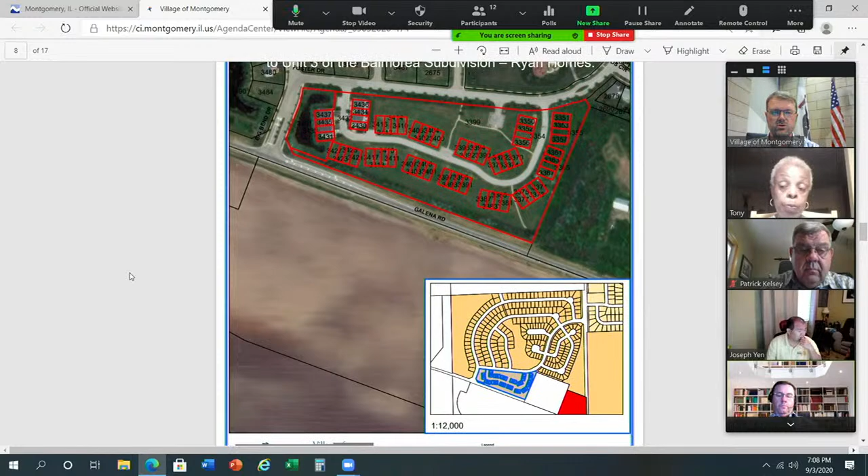Great, thanks Jared, appreciate it. Good evening everybody, thanks for having me tonight. Everybody hear me okay? Yes.

Yes, good. So I think since I've been in front of this group and the village board probably a little less than 2 years ago, we're happy to report that we've had great success in the Montgomery community on the single family side. We've sold 95 houses since the beginning of January of 2019. So really filling that community out well, I think to the pleasure of the neighborhood, and certainly we're happy with the performance there as well.

We are the contract purchaser for the homes. When we originally contracted to purchase the community and used an investor developer as part of that transaction, we did a bit of a delay on the townhome acquisition, really to try to continue to give time for the town market to heal, and such, to make it palatable to continue to move forward on the townhomes.

So I want to take a minute. I do want to let you know that we did have the opportunity to meet with the residents. I met with them personally earlier this week. I had mailed them a copy of the elevations, what we intended to do, the renderings. Met with, I believe, representatives from all the households out there, except for one, which I believe is being rented. And just as a courtesy to let them know what we're doing, we had a good meeting.

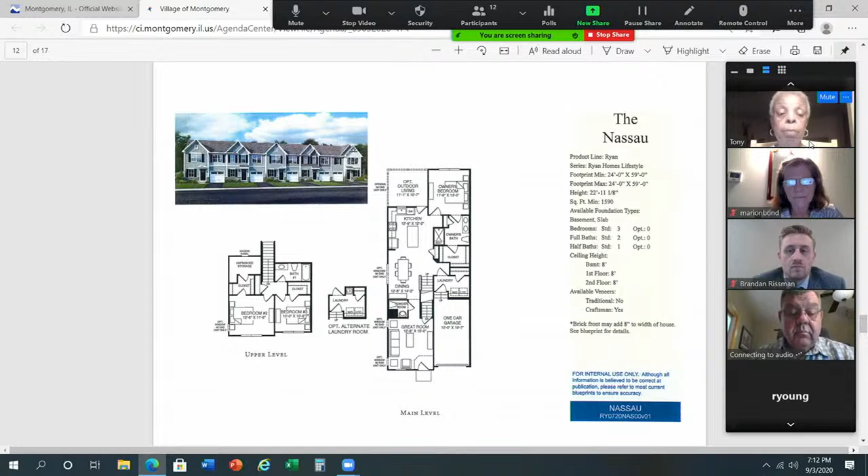As you may know, we are also involved in a community called Grand Reserve, which is a nearby community just within a few miles of this location - actually in Yorkville, but very close as the crow flies to this location - where we have, since being in there a similar period of time, sold 90 ranch homes, all ranch homes. It's an all-maintenance community that we provide, the lawn care and such for, an age-targeted community.

As those prices have continued to escalate over time, we've continued to see some demand for an empty nester product, but a desire to continue to be affordable. Our average price point in that community is roughly $260,000, and there's been a desire to continue to try to get in there and be affordable. We've noticed in the last 12 months, really, an increase in the number of requests for slab units because they were priced a little more affordably, and for that demographic that may not need as much space as what's provided in the 2-story. So given the demand that we've seen there and the desire to continue to provide an affordable product, we believe that this is an attractive option for the nearby area to continue to attract an empty nester.

And with that, of course, can come a desire to not have a 2-car garage or to have it be as necessary, because we do see some one-person families in that particular instance, or less cars. So certainly the demographic is a component of the desire here and why we've chosen a master-down product. And the second is some level of affordability. I mean, we see these priced in the low 200s. We have 2 sets of products within Balmorea right now, 2 different product series - one product series averaging about 250 and the other averaging just slightly over 300. So as a townhome product, this fits in nicely to get it separation from the existing 2-story product that's there.

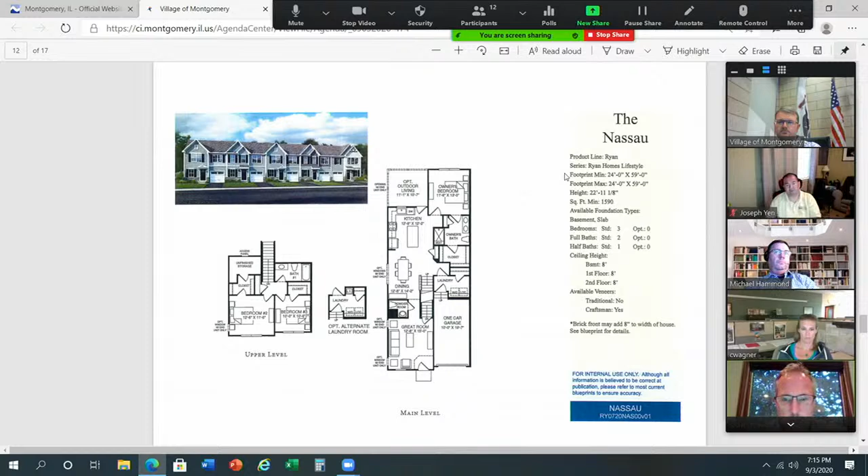I've shown really two options in terms of driveways. I showed a second option based on a conversation with staff that there could be some concern on parking. We are certainly not married to having a dual drive in front of each unit, but as you can see in this current rendering with the floor plan, it shows a single drive. Jared, if you'd scroll to the other picture, it would show it with a second drive. Initially we were not proposing that second drive, but if there was a concern around parking, we wanted to show that could be a potential option to address some of the parking concerns.

We see an opportunity and a need to continue to build out the community. Yes, the units are a little more narrow, but we are fitting within the existing platted building footprint. There's no increase in density. We have an engineer doing an analysis now; there may be some minor relocation of existing services needed given water services and such are in, but we're fitting it within the current window. If anything, the space between buildings becomes a little more pronounced and open because the units are more narrow than what was originally platted from the original developer. We'd appreciate your consideration, and at this point I'll stop and answer any questions you might have.

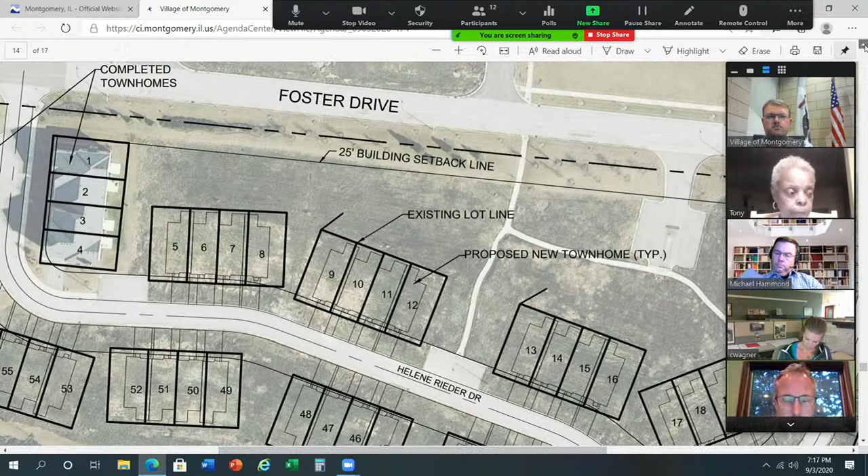It is a 20 -- I believe it'll say on here, I don't want to quote something that's not accurate -- you go up into the upper right-hand corner. 24 by 59 feet is the width and depth of that particular unit. So is that for each? Yes, for each unit, that's correct.

Okay, all right. So the plat for these units is a little bit different than a standard single-family home. A lot of them are platted around the actual physical structure with a lot more shared open space rather than each individual lot having its own private open space.

I hear the comment about seniors and downsizing. Some of the material that I read, however, is that townhomes tend to -- at least in the August 2019 research that I did -- tend to be more toward first-time home buyers, unless it was a designated senior project, for seniors only or in that direction.

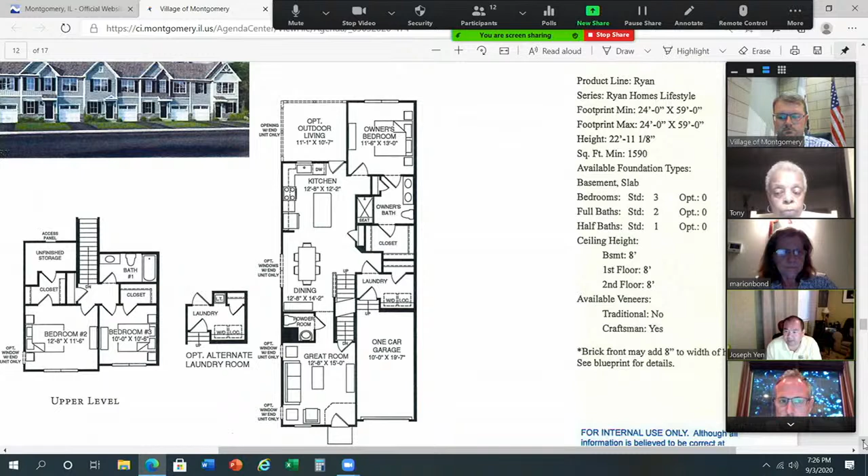I had a quick question. On your diagram for the expanded driveway, was it proposed to be concrete, or will it be the blacktop asphalt like the previous picture of the driveway? The driveways are meant to be asphalt, which is consistent with what's in the community. The picture is showing concrete, whereas the previous picture showed asphalt - I put that to be illustrative of what can be done in terms of a second parking area.

And if you had a second parking area between unit 56 and 57, you show a little overlap on the driveways in that one diagram on page 14. So 56 will be on the left there. Is that just not to scale, or is that something you have to solve for as well if you want it that way? So 56 and 57, you have overlap.

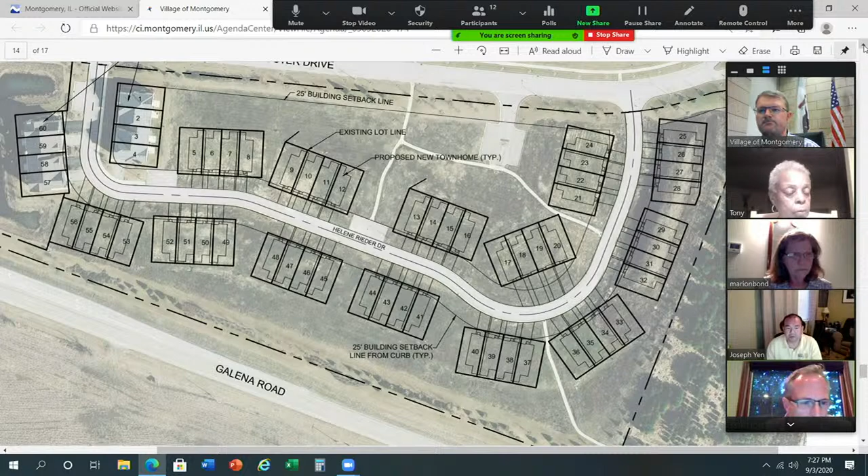So clearly we have plenty of room in the building itself - the black outlines are the original size for what was originally platted and approved and could be built out there. So ours would actually be a lot closer. If indeed there is a conflict there, we could easily have plenty of room within the building envelope to slide that building further towards units 52 and 51 to avoid any conflict. Thank you.

Okay, are there any more questions or comments from commissioners? Since this is not a public hearing, there's no findings of fact or anything of that nature.

The only thing I'd like to add, my preference would still be to see 2-car garages. I don't care for adding asphalt as a parking area in the front yard of a townhome. That's just my thoughts on this. Thank you.

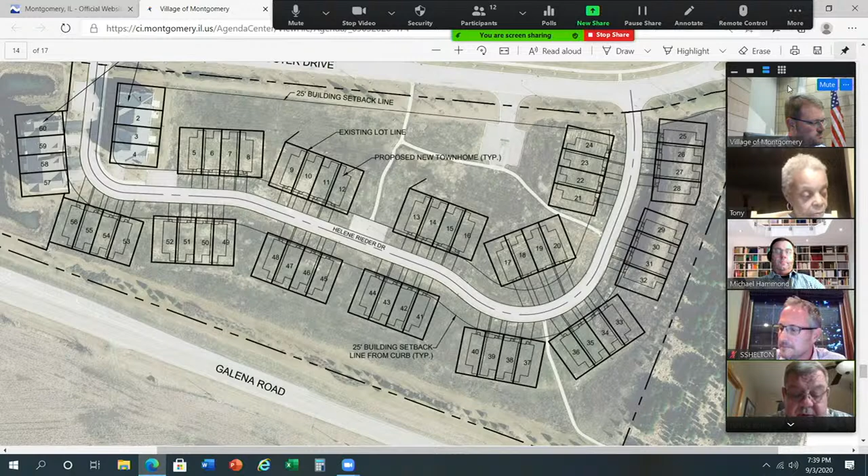I'll make the motion, Mike. I move the approval of PC 2020-007, preliminary plan review for an amendment to the annexation agreement of Unit 3 of the Balmorea subdivision. Thank you. Got a motion, looking for a second.

I'll second. Thank you, Mildred. Chris, can you call the roll please? Patrick Kelsey, yes. Mike Hammond, yes. Mildred McNeil James, yes. Joe Yan, yes. Marion Bond, yes. Tom Yukaitis, yes. Okay, and this item will go in front of the village board meeting on Monday, September 14th. Okey doke, that is correct.

Next item on the agenda, community development update and new business. Planner Shipman: just a short update for you this evening. A couple items that have occurred. One, the village board did approve a couple of different stationary food vendors. One was Primo's Tacos, this happened in July and I forgot to mention it at the last meeting. Primo's Tacos was located on Montgomery Road and they have now transitioned to a location on Douglas Road. Also, Georgie's hot dog stand has recently been approved for a location in front of the Planet Fitness building owned by U-Haul. So a couple stationary food vendor updates. After that, we have some items we're looking forward to in the future, so we should have another meeting or two this fall.